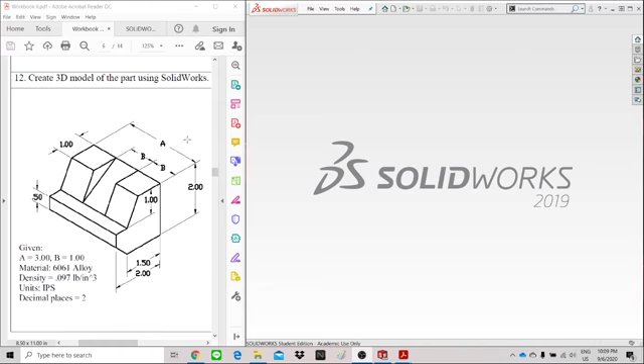Exercise number 12. In this exercise, we will learn about how to use the extrude and the extrude cut. Go to the new part document.

In this part, we have to use the unit inch IPS, inch pound second.

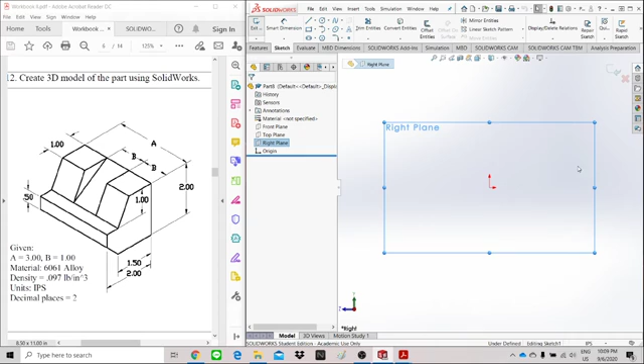From the isometric view of the drawing, I will select the right plane over here and go to sketch. I'll start the sketch and place the origin over here.

One sketch, and then give the dimensions equal to 2, 1.5, from here to here.

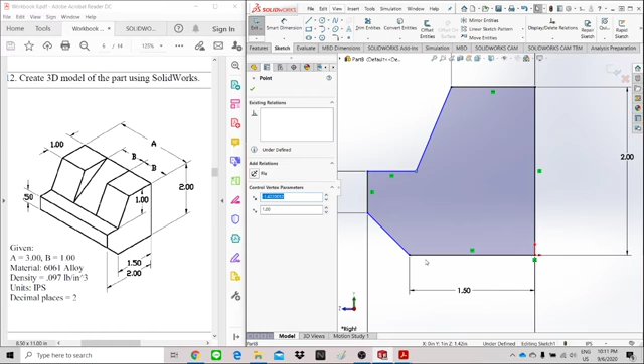This is the inclined surface here. I should trim, and from the drawing, this point and this point should be coincident, like this, and then this dimension is gone. Give the dimension again. Okay, finished.

And then I go to extrude. I use extrude boss and base, and let's see, because we have to cut at the middle of here, then...

I'll use the blind, the first direction of the blind. This one is the first direction, it should be equal to B. B is equal to 1 inches, and then select the direction 2.

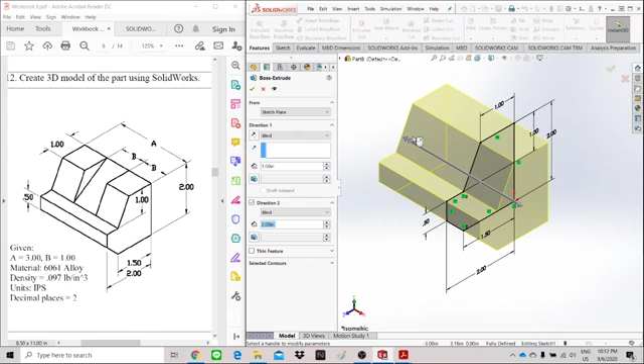The direction 2 will be backward, like this, and it should equal 2, because the whole body, the width of the whole body, is equal to 3. I'll extrude at the first direction with thickness 1, and then the second direction should be equal to 2 inches. Like this, and then I click OK.

Why did I do that? Because you will see that our sketching plane, when we start sketching this, we sketch at the right plane. Okay, our sketching plane is on the right plane, and then I need to cut over here.

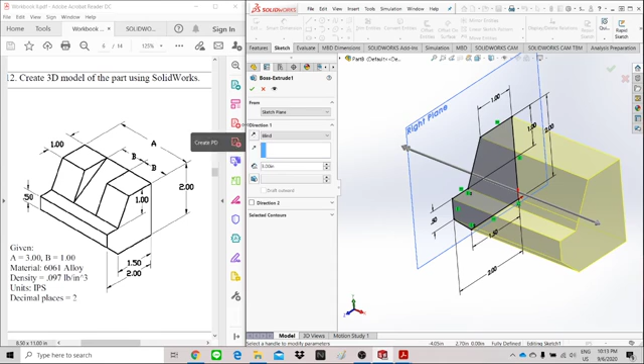If you sketch, let me show you. If you don't use 2 directions like this, and then you just extrude with the whole thickness of the part in just only 1 direction, like this, let's say backward only 1 direction.

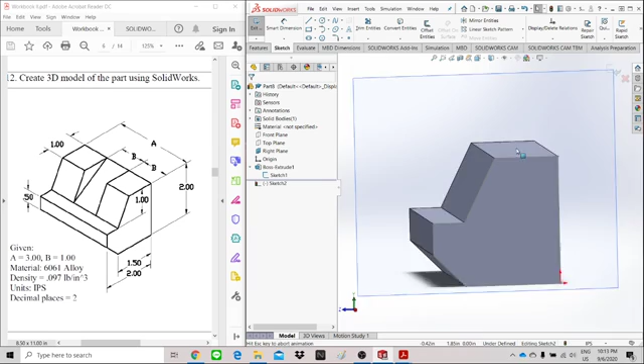The right plane will be on this surface like this, and then when you would like to cut here, if you sketch the cut on this surface or the right plane like this, it should be in this profile, like this.

Then you can see that our sketching plane is over here, and when we cut, they will cut from the sketching plane, from the sketching plane like this. Okay, but we can do...

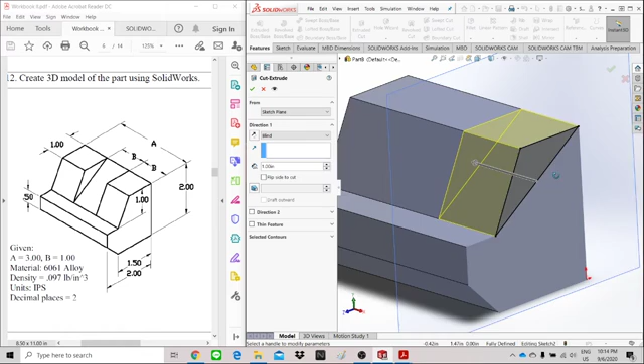But if you would like to cut, start at the depth of 1 inches, 1 inch. Start at the depth of 1 inch. You can select from the sketching plane, or offset from the sketching plane at 1, like this, and then reverse directions. You will see that the cut will start at the depth 1 inch, offset from our sketching plane. Okay, the B is equal to 1.

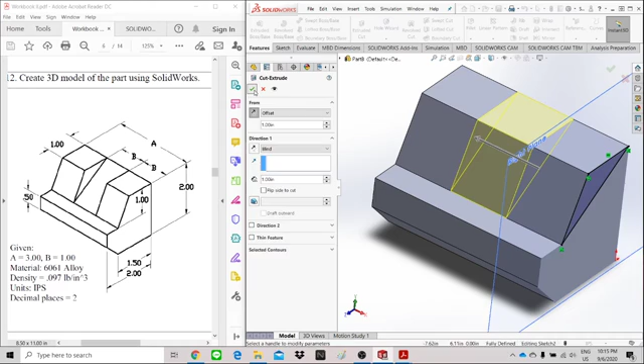If you did like that, this is one way to cut this, to do this part, and give the material, set the material to...

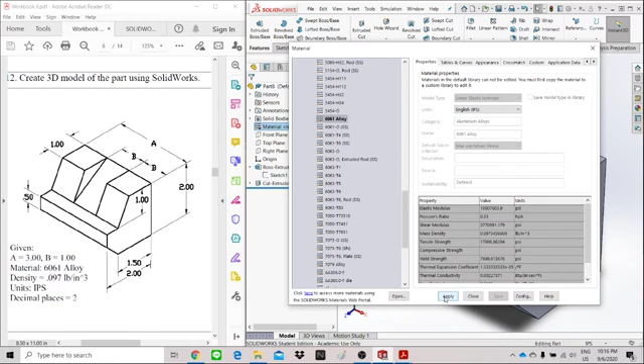6061 alloy, 6061 alloy, it should be aluminum alloy, 6061 alloy. The mass density should be in pounds per cubic inch. Just apply and then close.

You go to evaluate and then measure the mass property. The mass property of the part, this one is equal to 0.87 pounds.

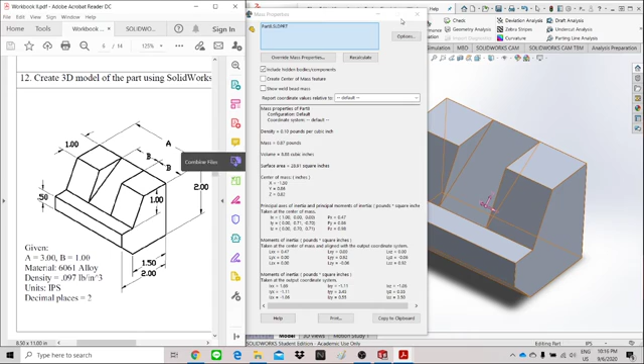Okay, if you do like this, when you use the extrude cut, you have to set the offset of the cut from the sketching plane. Normally, if we don't set anything, it will be default. The default will be the sketch plane, like this, it will cut from the sketch plane. But in this case, we don't need to cut from the sketch plane, but we need to cut at the depth of 1, offset from the sketch plane.

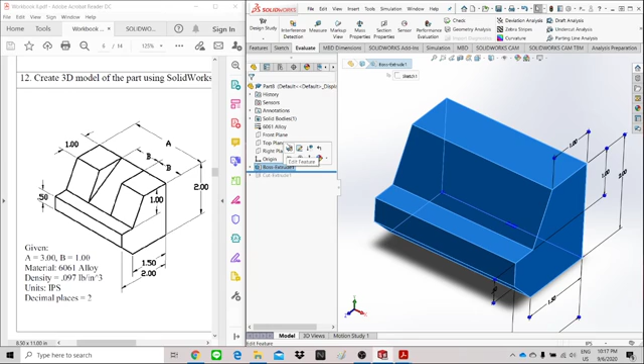This is one way, but there's another way: if I extrude in 2 directions, the first direction at the front, and the direction 2 with 2 inches backward, like this.

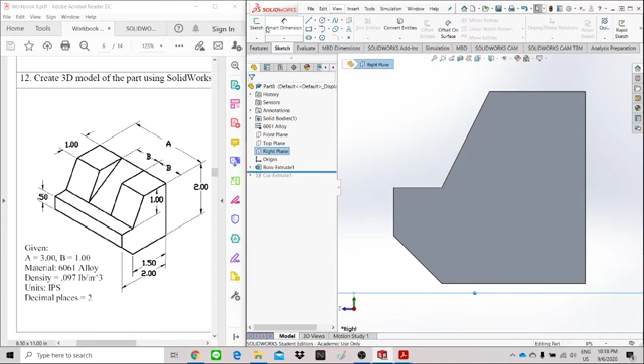If I did like that, I will have the plane at 1 inches deep, 1 inches offset from this surface. I can select the right plane as a sketching plane like this, and also sketch same as before.

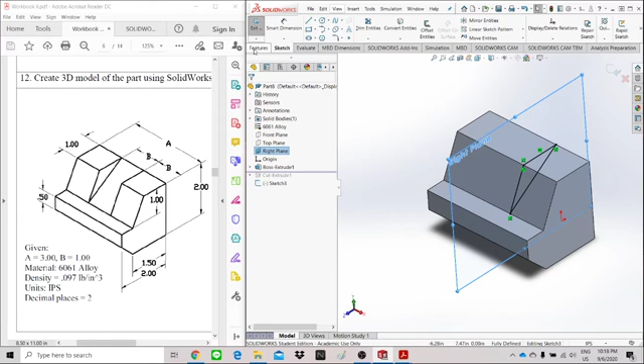You will see that because I sketch on the right plane, my sketch will be on the right plane. That right plane will be offset from the right surface at 1 inches. Okay, then I can select extrude cut like this.

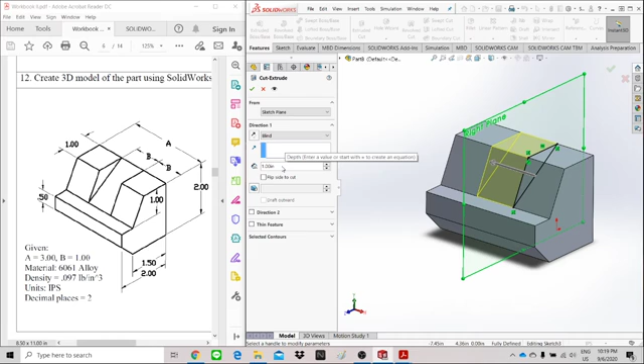Then I no need to set, no need to select the from offset at all. Just select the sketch plane, and then set the thickness as 1 inch.

Like this, then go to evaluate and mass property, check the mass again. Okay, the mass is the same. There are two ways to create this part.